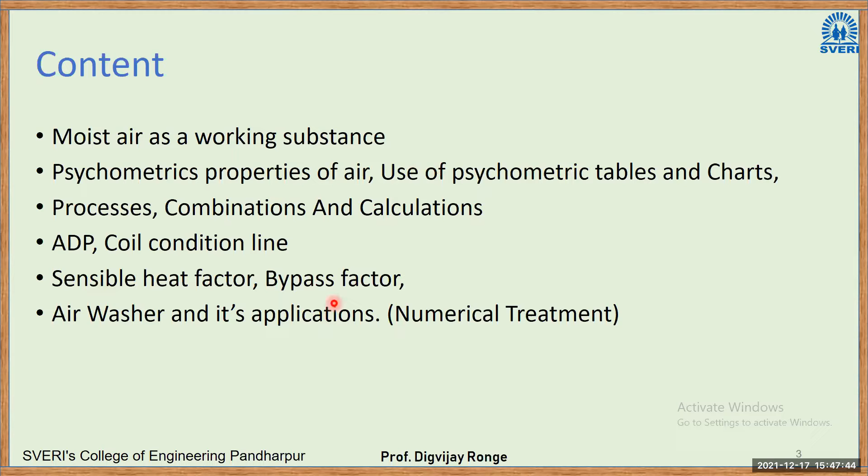Moist air as working substance. Psychrometric properties of air, use of psychrometric tables, charts, processes, combinations, and calculations, ADP, apparatus dew point, coil condition line, etc. Sensible heat factor, bypass factor, air washer and its applications. Now, what I have taken in poll number 1 was related to mixture of gases. So what is the air in that case?

So psychrometry, the name psychrometry is given to the study of properties of air-water vapor mixture. So it is a study of moist air. Generally, atmospheric air is a mixture of gases like nitrogen, oxygen, argon, hydrogen. Water vapor is there because of evaporation from the oceans, rivers, etc. Then we have dust particles, fumes, etc., all those small solid particles suspended in the air.

But in this case, only these two parts, mixture of gases plus water vapor, are termed as moist air. And psychrometry is the study of moist air. We are not considering dust particles, fumes, etc. The atmospheric air is a mixture of many gases plus water vapor and a number of pollutants. The concentration of water vapor and the pollutants decrease with altitude.

So see, this is the Earth surface where we are living. As the altitude increases, obviously because of density, solid particles will be available in a certain layer. After that layer, because of their weight or density, they cannot go upward. Above that layer, we have air plus water particles. Up to a certain altitude we can have water vapors; then again, because of their density, they cannot move upward. After some altitude, we have only air.

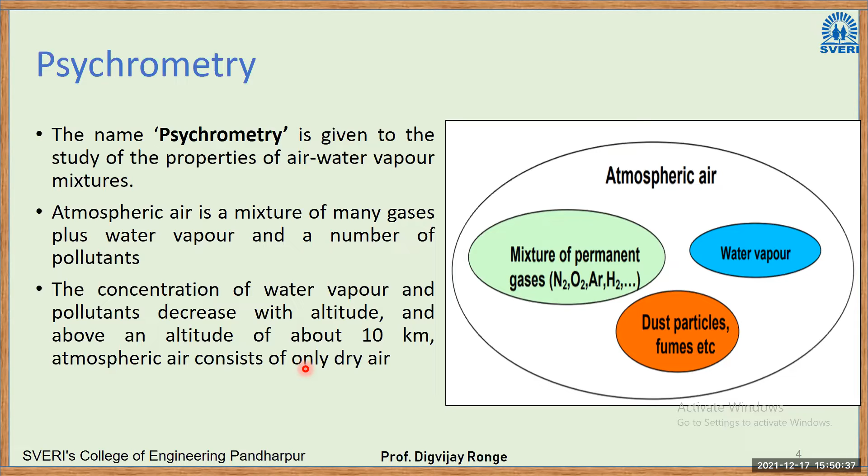So psychrometry is the study of moist air: mixture of gases, what we generally call air, plus water vapors. Moist air can be thought of as a mixture of dry air and moisture. Dry air means a mixture of gases like oxygen, nitrogen, carbon dioxide, argon, etc., which you have studied from high school. Why dry air? Because it does not contain water vapors. Dry air plus water vapor, that will be moist air.

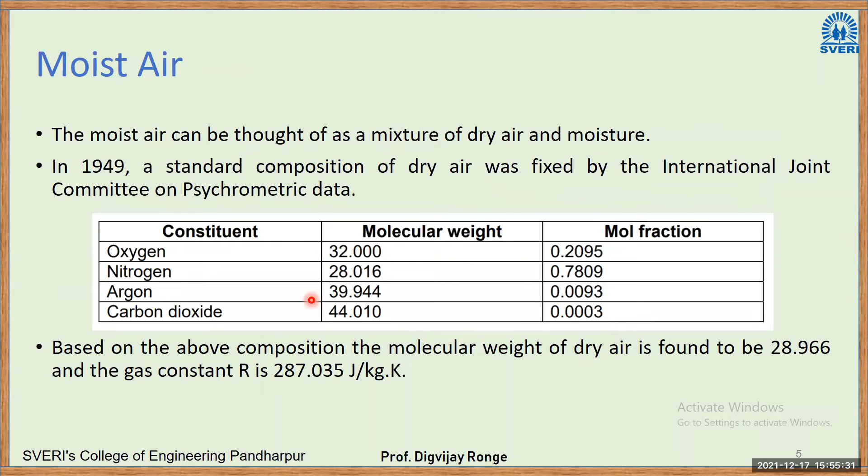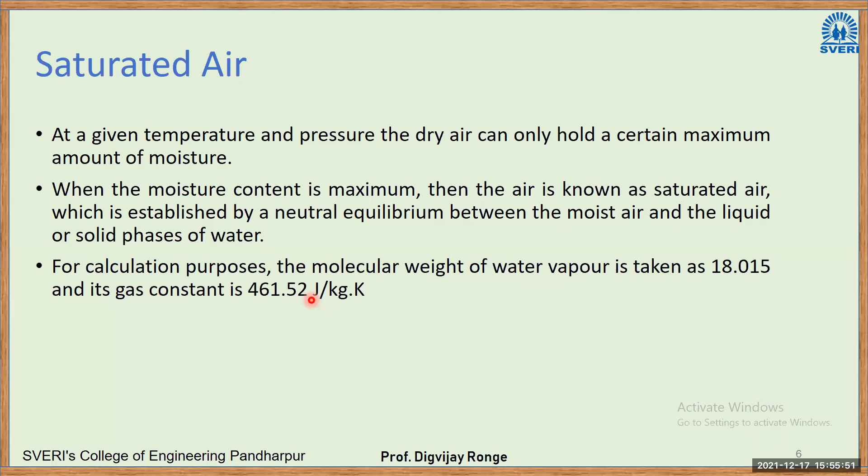Up to this point, we have seen moist air, the composition of dry air, and the concept of saturated air. Now, how to decide the maximum capacity of holding water vapor? That depends on the partial pressures. So what is the concept of partial pressure? We'll see, and then we can stop. There is a law, Dalton's law of partial pressure. You might have already studied this; again, we'll study it today.

Partial pressure means, suppose this is the air. We are now dealing with moist air; from this point up to syllabus completion, we deal only with moist air. Moist air is a combination of dry air and water vapor. So the pressure of the atmosphere is the summation of the partial pressure of dry air plus the partial pressure of water vapor. Partial pressure means the individual pressure exerted by that gas. Summing all of these gives the total pressure.

Both dry air and water vapor in air generally follow the ideal gas law. So the total pressure P is equal to PA, the partial pressure of dry air, plus PW, the partial pressure of water vapor, as per Dalton's law of partial pressure.

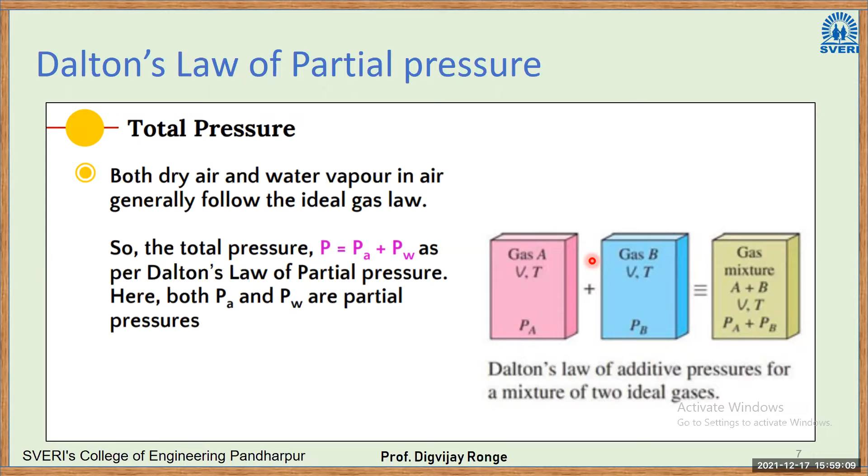The larger the difference between these two, the more capacity to absorb the water vapors. And the smaller the difference between the partial pressures, the less capacity to hold the water particles. So when you see rain, there is very little difference between partial pressures. It has exceeded its capacity to hold the water particles. As it can no longer hold water particles, we get rain. Okay, I hope I'm making it clear to you. It depends on the difference in partial pressures of air and water particles. As time comes, I will explain more.

Now we'll see some of the psychrometric properties. The first property of psychrometry here is temperature. We have been studying temperature for almost a decade now. For you; I've been studying this for almost 2 decades. In this case, there are 3 temperatures, right? Whatever temperature you have studied up to this point of engineering is called dry bulb temperature. Why is it dry bulb temperature? It refers to dry air.

Okay. So we have a thermometer, we are putting it in the atmosphere, we are measuring the temperature. So that is the temperature of dry air. So we have given it the term dry bulb temperature. In that case, the instrument, the thermometer, is as it is. We are not tampering with it with any other accessories. Whatever temperature we are getting there is the dry bulb temperature.

Then there is another scenario in which we cover the bottom of the thermometer, where the mercury lies, with a wet cloth. After that, due to the evaporation of water, the temperature drops, and that reduced temperature is considered the wet bulb temperature. For those who did not understand, I'll explain again with the help of a diagram. There is an instrument called a sling psychrometer, in which we have a dry bulb thermometer and a wet bulb thermometer.

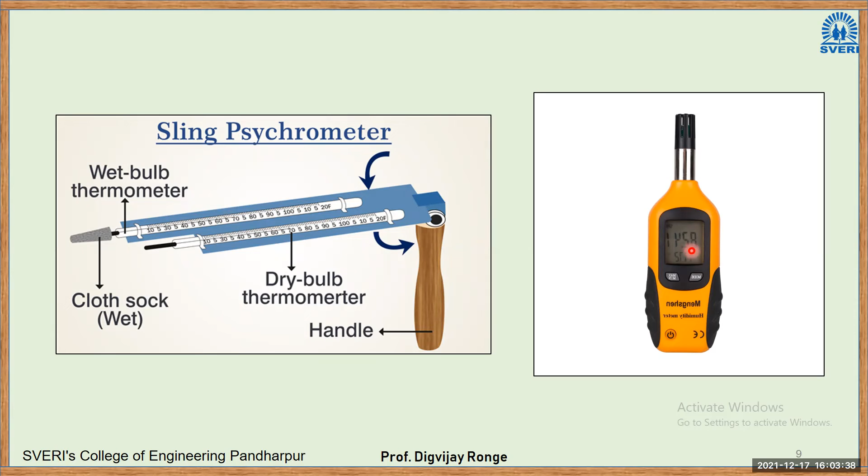So this was the old age. This is the new age. You can measure it with the help of a digital psychrometer. Here it will give you DBT, WBT, and also dew point temperature. Now, what is the dew point temperature? We'll see. So we have seen dry bulb. Wet bulb, WBT, is the temperature obtained by an accurate thermometer having a wick moistened with distilled water. That instrument is called a psychrometer.

Now next is dew point temperature. DPT is the temperature at which liquid droplets just appear when the moist air is cooled continuously. So we have moist air, that is a mixture of air and water particles. We are cooling it. Now at some point, air will become saturated. After saturation, if we reduce the temperature, water particles condense. Now in that process, condensation starts, dews are formed.

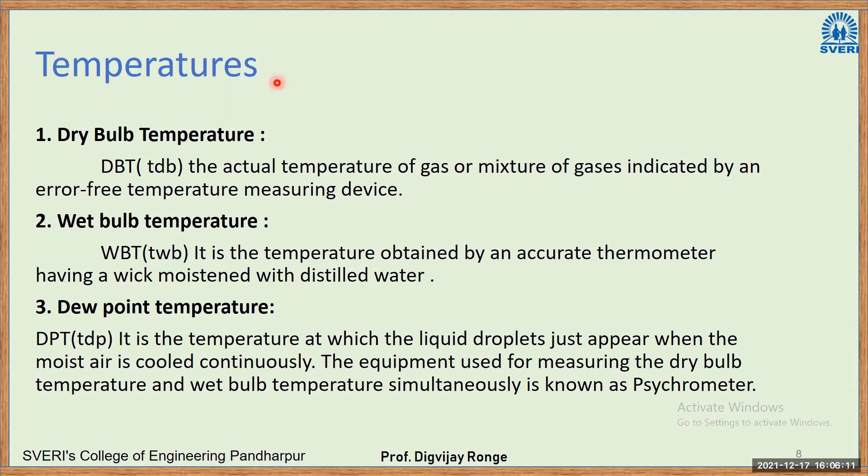So I hope you understood the temperature part of psychrometry. It is one of those properties. Then there are other properties like humidity, humidity ratio, specific volume, relative humidity, enthalpy of moist air, etc. So various psychrometric properties are there, but the most important property here is temperature. Okay, so I hope you understood the temperature part.

Now comes the saturated vapor pressure, or what we call PSAT. We'll see one by one. It is the saturated partial pressure of water vapor at the dry bulb temperature. So the partial pressure of water vapor where it becomes saturated, we call the saturated vapor pressure. Already I have explained this concept of partial pressure. Here, if this is air and this is water vapor, they have their individual partial pressures.

Now, the value of the partial pressure of water vapor where it becomes saturated with the dry air, we refer to as the saturated vapor pressure. At that condition, the air becomes saturated. There are tables of partial vapor pressures. This is the temperature, then this is the partial vapor pressure of water. As the temperature drops, the partial pressure also drops. Then comes the saturation criteria. Air becomes saturated.

You cool the air below the saturation, then the dew gets formed, right? Or the condensation of the water particles takes place. We cannot say condensation directly because it has very different meanings for different applications. In this case, we'll say dew gets formed, right? So there is a

moist air, right? Then there is some difference between their partial pressures. We are reducing the temperature of air, right? At some point, what happens? It becomes saturated. If you cool the air below its saturation conditions, dew gets formed, and that temperature we are referring to as the dew point temperature, right? So we are talking about saturation condition. That means dry air has reached its maximum ability to hold the water particles.

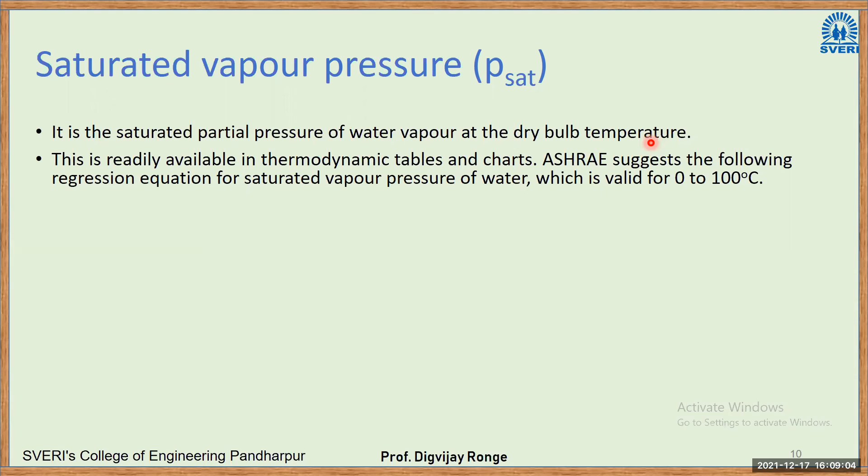So it all depends on partial pressures, temperatures, etc. And the value of saturated vapor pressure is fixed for different pressures and temperatures. So this is readily available in thermodynamic tables and charts. ASHRAE suggests the following regression equation for saturated vapor pressure of water, which is valid for 0 to 100 degrees Celsius. So this is the regression equation.

How do they get the regression equation? Very simple. They conduct some experiments. They calculate the saturation pressure, and then they try to link variables with the output, and that way they get the regression equation. So those who have studied data science or who are interested in studying data science will come across such regression equations, right?

You will be given variables and their output. Then there comes a step in data science where you have to go for the regression equation. Once you get the regression equation, after that you can predict the future, right? So there are some programs for forecasting, etc. In that case, once you know the regression equation, for any value you can calculate the output value. Okay.

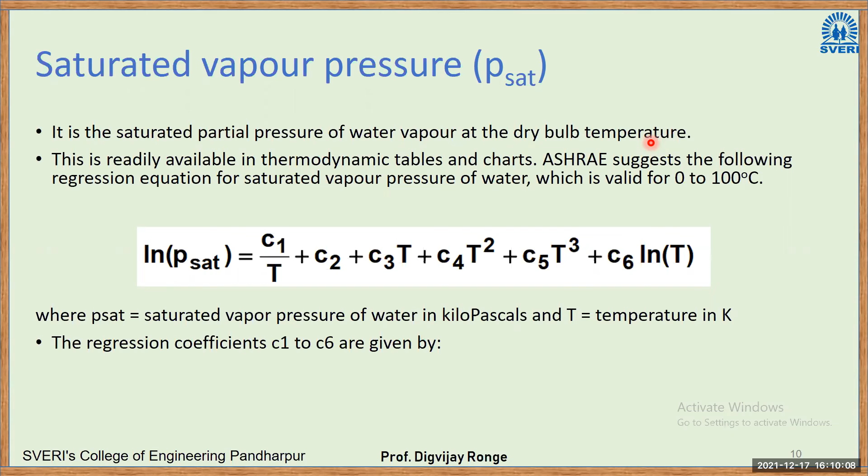We are at this temperature, 29 degrees Celsius. In this case, if you want to saturate the air, the partial pressure of water vapor should be 41 millibar. These values are in millibar, 10 to the power minus 3 bar. So suppose the temperature of air increases to 32 degrees Celsius, the partial pressure of water vapor required to be saturated increases to 48. Okay. So this way these things work, right?

Now if you decrease the temperature, let us say you go down to 10 degrees Celsius, in that case the partial pressure of water vapor in order to become saturated should be 12.3 millibar. So at this time maybe the partial pressure of water is 15 millibar. In order to become saturated, it has to go down to 12.3 millibar. So in this way these tables are given.

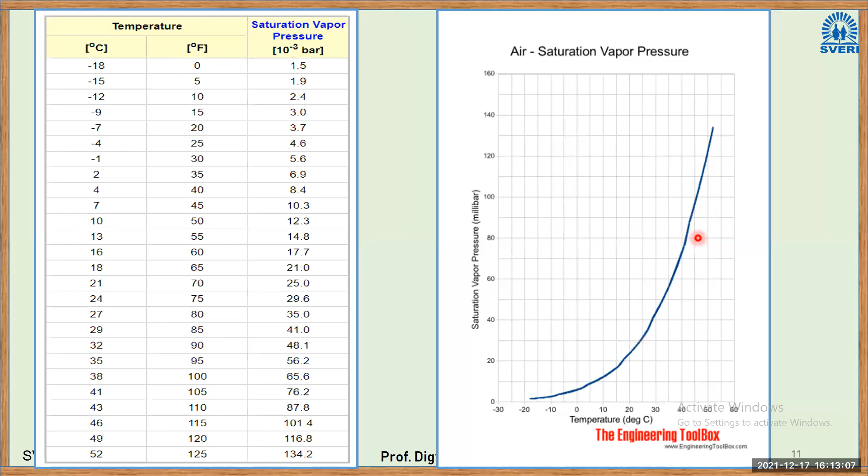The more the saturation pressure is, the less the chances for rain or fog, and the lesser the saturation vapor pressure is, there are higher chances for rain or fog. Okay, so I hope you are understanding the concept of partial pressures. If any doubt is there, please ask.

So I think this is sufficient for today's lecture because the strength is also low, and this is a very important concept. I don't want to skip it. Right. So I will recap whatever we have learned up to this point, then we can close.

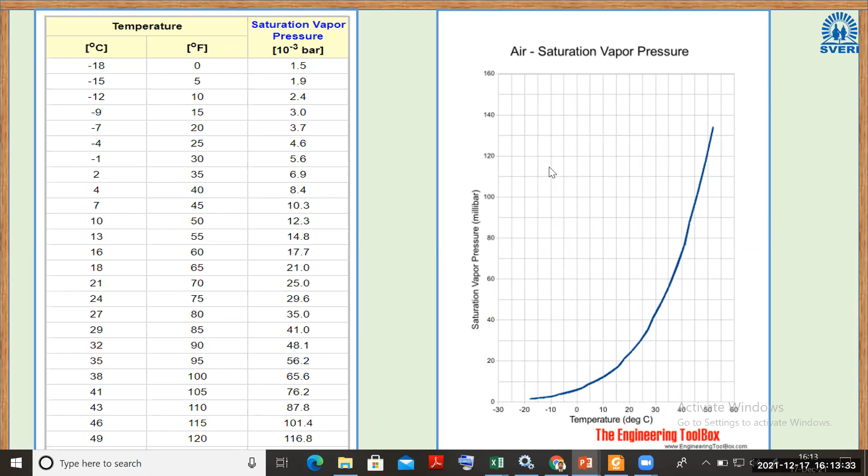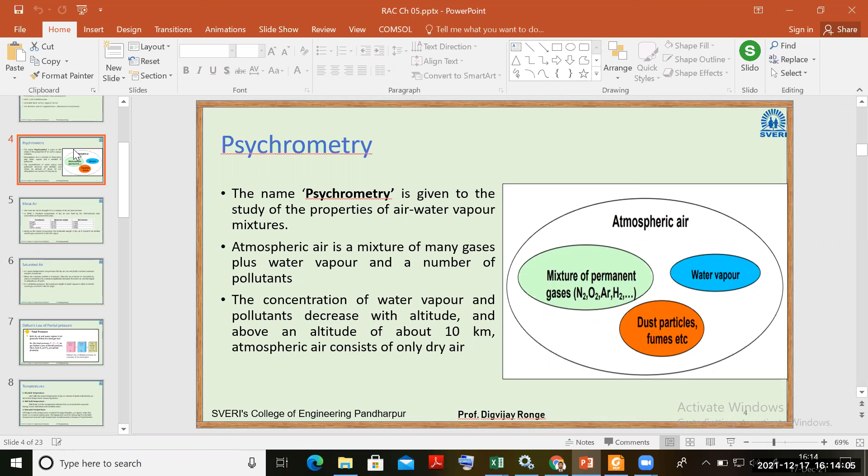Right. So we started with psychrometry. Psychrometry is the study of moist air. Again, this is one MCQ which was asked previously, and many people, as they have very less tendency to give attention to the details, could not answer it in the external oral examination. So simply, what is psychrometry? Psychrometry is the study of moist air. What is moist air? Moist air is the mixture of dry air and water vapors, right?

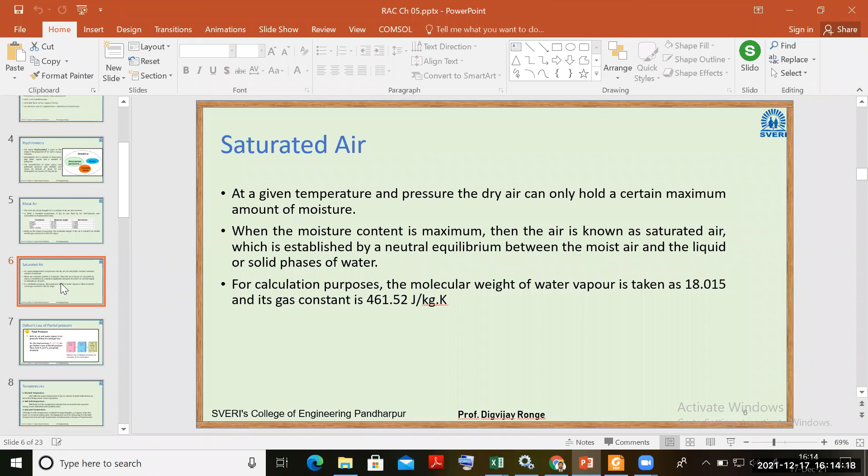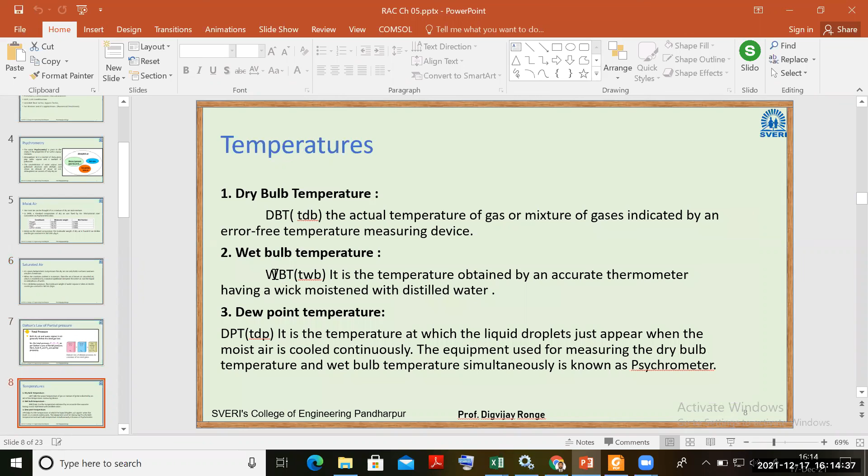Now we have seen the saturated air condition. What is the saturated condition? It is a condition at which the air has reached its maximum capacity to hold water vapors. Then we have Dalton's law of partial pressure. Then we have seen the psychrometric properties. The first psychrometric property we have seen is temperature. There are three temperature values we have to deal with. First is DBT, dry bulb temperature. Second is WBT, wet bulb temperature. Third is dew point temperature, or DPT.

So there are instruments. Previously they used the sling psychrometer. Nowadays they use the digital psychrometer. So remember this word, psychrometer. This is another MCQ: the instrument used for the measurement of WBT. You should know that is a psychrometer.

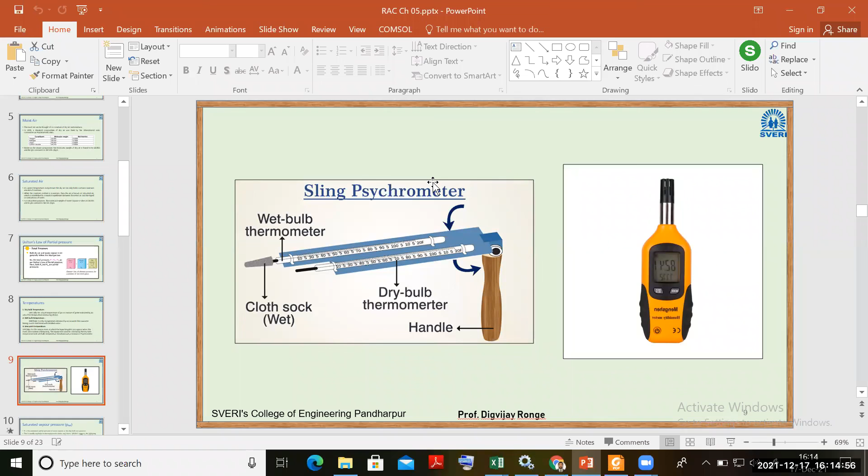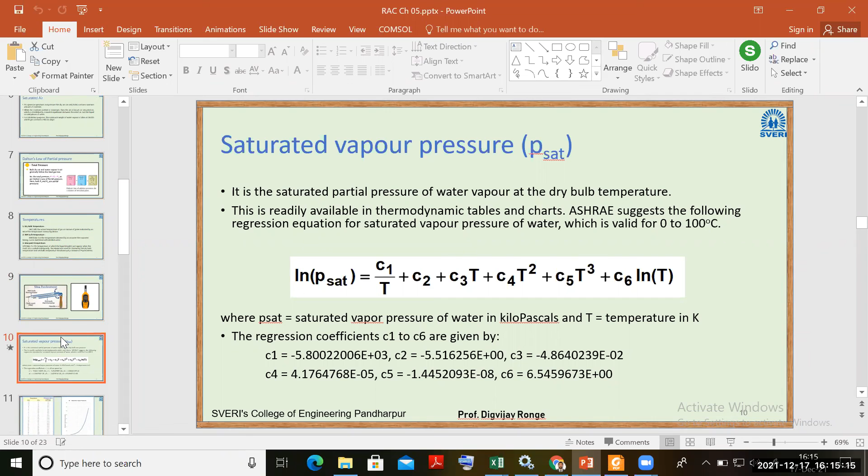Then we have seen the saturated vapor pressure. It is the partial pressure of water vapor required for saturated conditions, right? For the air to become saturated, this is the partial pressure of water required. Then there is this table. We have seen as the temperature of the air or atmosphere increases, the saturated vapor pressure also increases. As this increases, there are very less chances of rain or fog formation. As the temperature reduces, the saturated vapor pressure is reduced, and there are higher chances for rain or fog.

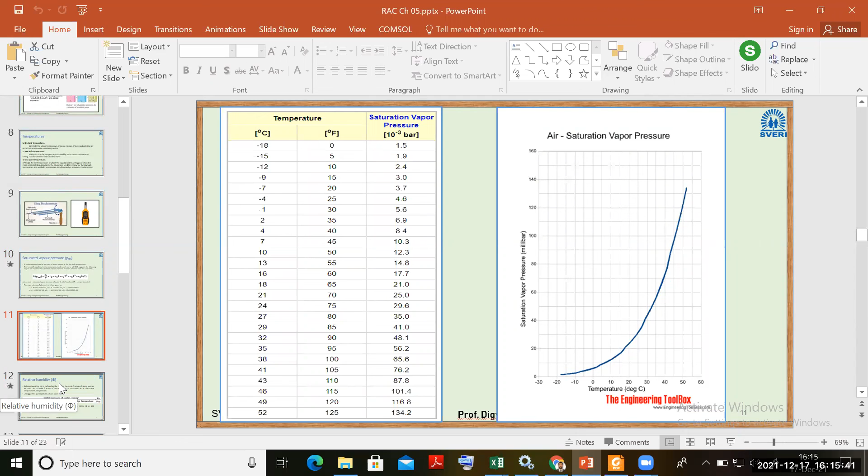In the next lecture, we will see other psychrometric properties, like relative humidity, humidity ratio, enthalpy, specific volume, etc. Many psychrometric properties are there that we'll see one by one.

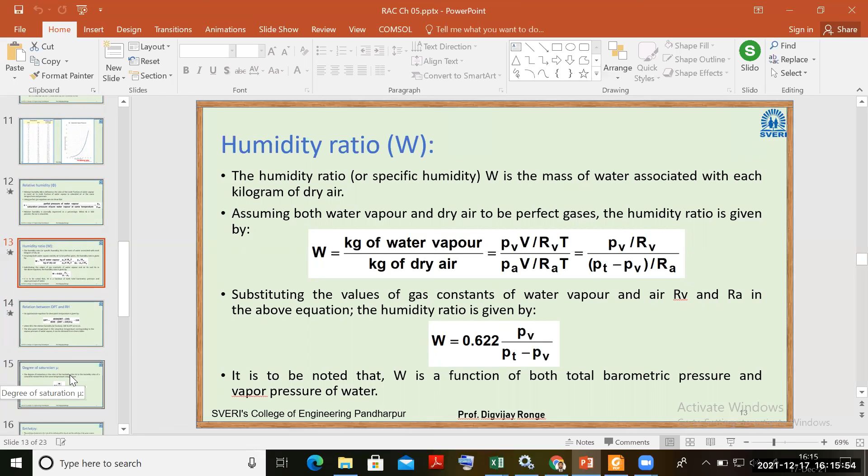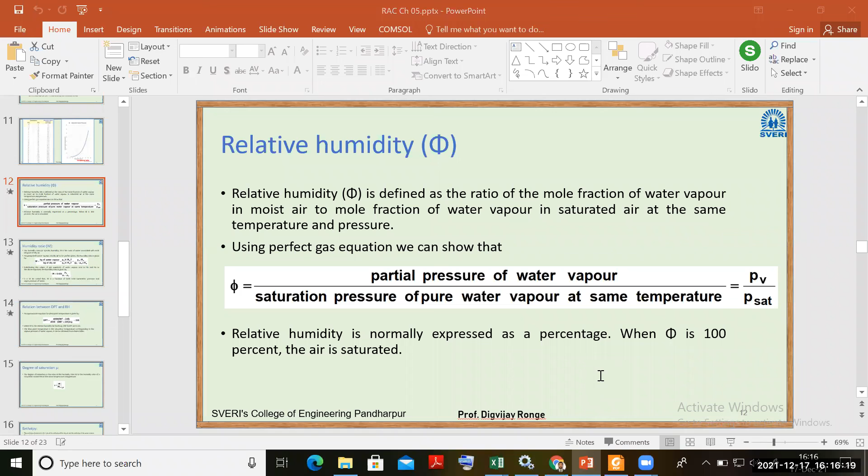Okay. Again, I wish you all the best, those who are preparing for Capgemini. And those who are interested in doing the internship, anyway you have to do it compulsorily next sem. In that case also, please approach me. We will try to get internships in very good companies like Blue Star, Johnson Controls, Carrier, Hitachi. So many companies are there in this field of refrigeration and air conditioning. We will try to get internships from such MNCs also. Those who are interested can approach me. You can tell your friends also. You can form groups; in groups also we can apply. So put your roll numbers in the chat box, and then we can close.